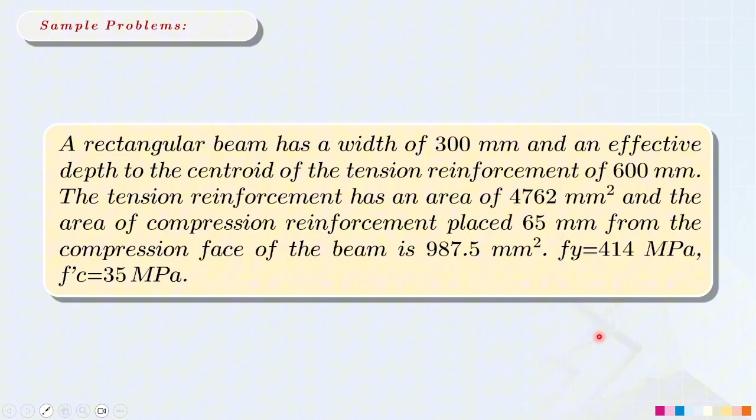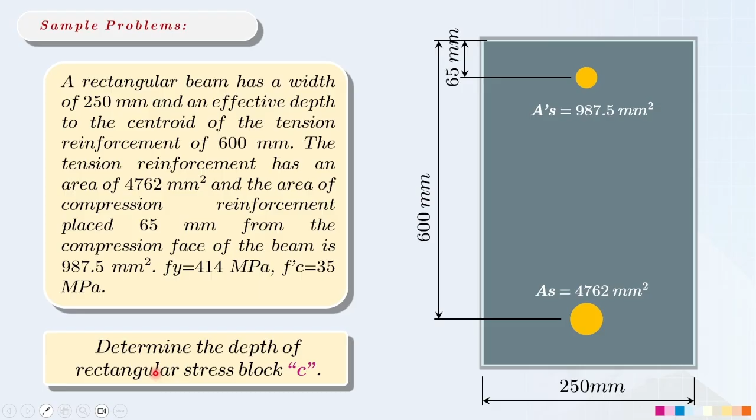So in detail for our section, this is how it looks. We need to analyze if this is a doubly reinforced beam or a singly reinforced beam. So we need to determine the depth of rectangular stress block, which is the variable C.

Let's have our preliminary steps, which is very important in determining if this section is doubly or singly reinforced. Let's determine first the effective depth to the tensile steel, which is 600 millimeter. And for our effective depth to the compression steel, as stated in the problem, the value is 65 millimeter.

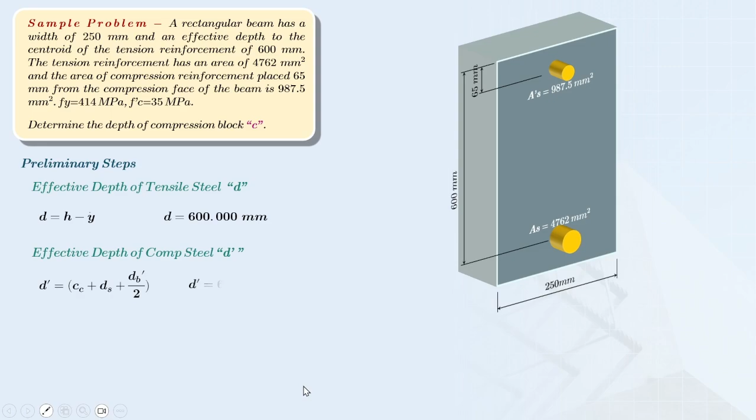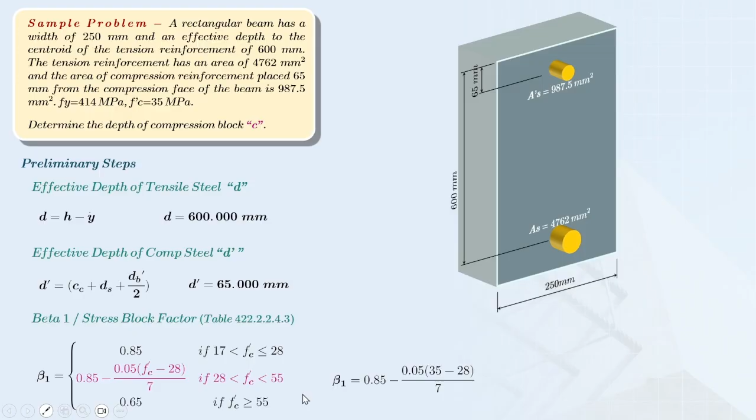So let's determine the value for our beta 1, or the stress block factor, which is dependent on the value of F prime C. Our F prime C here is 35 megapascal, so this will fall under our second condition. By simply substituting in this formula, our beta 1 here is equal to 0.8.

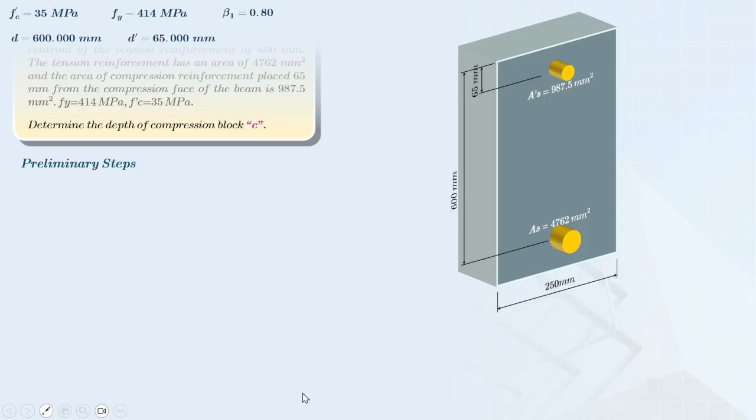Since the area of our reinforcement in total is given, for tension this is 4,762 square millimeter, and for compression this is 987.5 square millimeter. So in determining our actual steel ratio, which is the total steel reinforcement in tension, we just divide it by our gross area. So the result here is

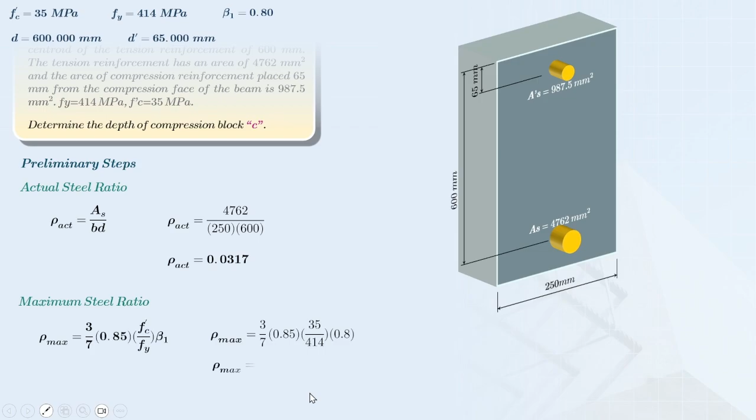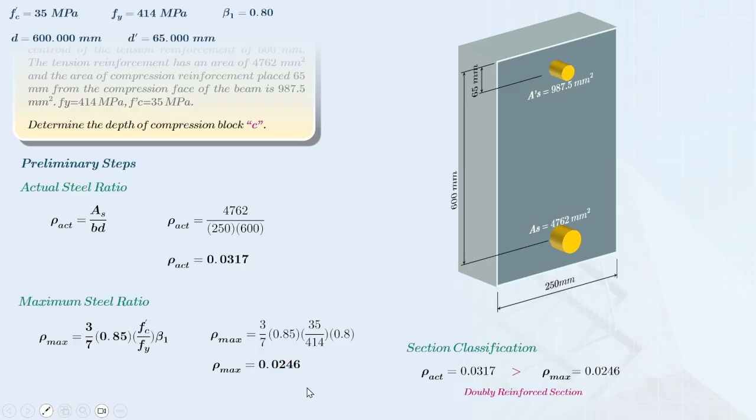0.0317. For the maximum steel ratio, using this formula, the value we get is 0.0246. In comparison, our actual steel ratio is higher than our maximum steel ratio. Therefore, this is under a doubly reinforced section.

In this manner, we will consider the area of the compression steel reinforcement. So we will have two kinds of analysis: first is the stress diagram for our concrete, and the second one is the stress diagram for our compression steel.

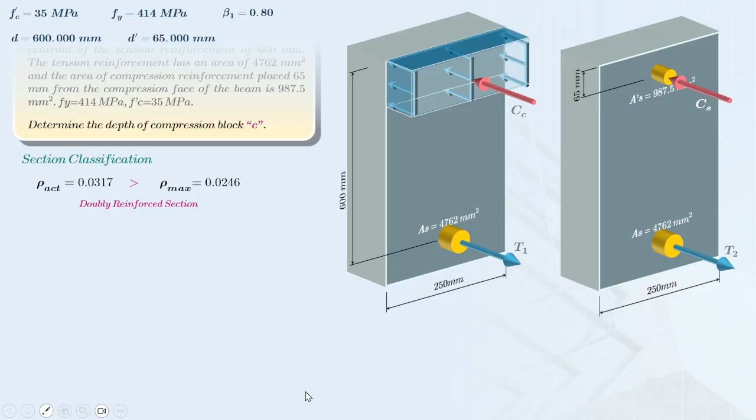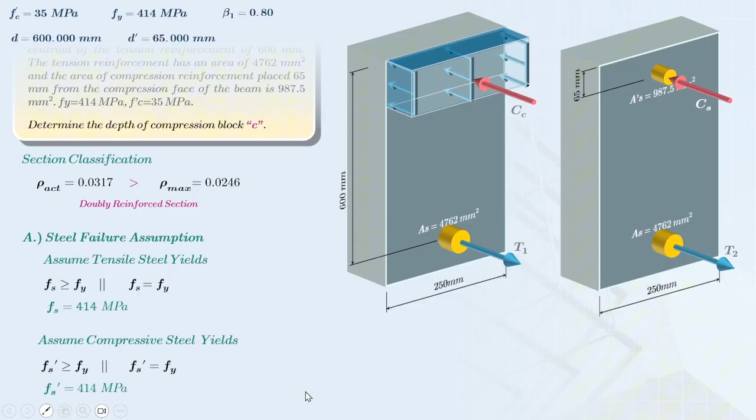So for this doubly reinforced section, for our steel failure assumption, we will assume two kinds of failure. First is for our tension reinforcement, I will assume this as steel yields, so I will consider that my rebar strength is the yielding strength, which is 414 megapascal. Then for my compression steel, I will assume this as yielding also, so I will use the value for my Fs prime, which is 414 megapascal also.

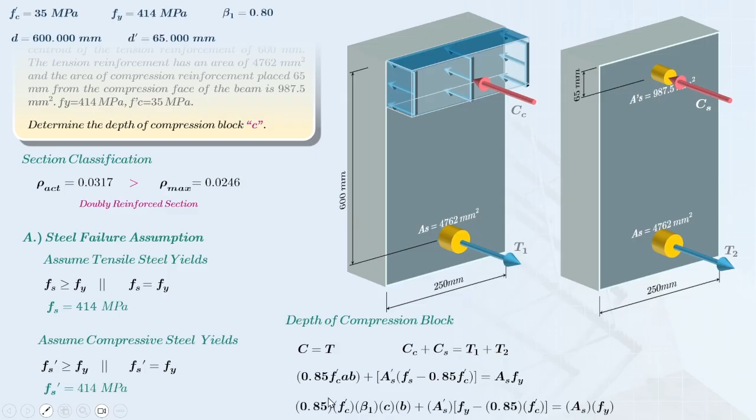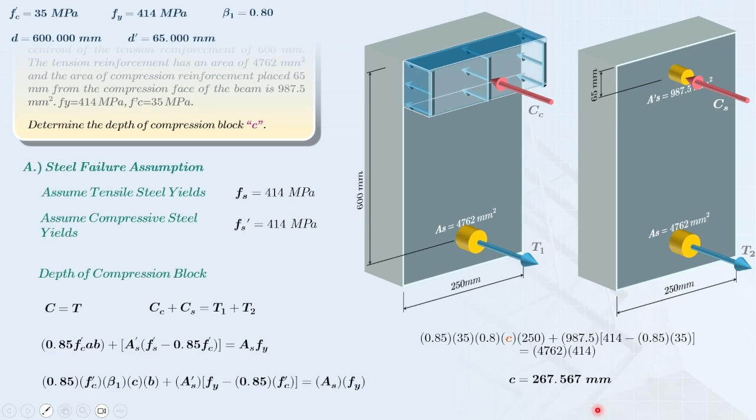In determining for our first sample problem, which is to determine the depth of the compression block, the value of C, I will utilize the equilibrium compatibility. Substituting the equation, this becomes our more detailed equation. What I did here is substitute the formula for A into beta 1 times C. Let's substitute further to get the value of C, which is 267.567 millimeter. But we cannot yet consider this final, because we need to confirm our assumption here.

This is by determining the actual rebar strength, which for the tension reinforcement, the value we get is 745.460 megapascal, which is greater than 414 megapascal, meaning this still yields. This means our assumption earlier was correct, that our tension reinforcement yields.

Then we will also determine the compression reinforcement, which is we need to determine the actual rebar strength. The result here is 454.242 megapascal, which in comparison with our yielding strength of 414 megapascal, still yields. But please take note later on we will have substitution for our design moment.

Since the actual rebar strength for the compression steel passed the yielding strength, we will use 414 megapascal. But still, our assumption here is satisfied. That means for our final answer, the value of C here is now equal to 267.567 millimeter, as the checking of the assumption here is now correct.

Now let's have this next follow-up sample problem. From this given, we need to determine the depth of rectangular stress block A. This is very simple because we will use this formula. You need to just multiply the depth of the compression block by our beta 1. So the depth of rectangular stress block A is now equal to 214.053 millimeter. So that's our answer.

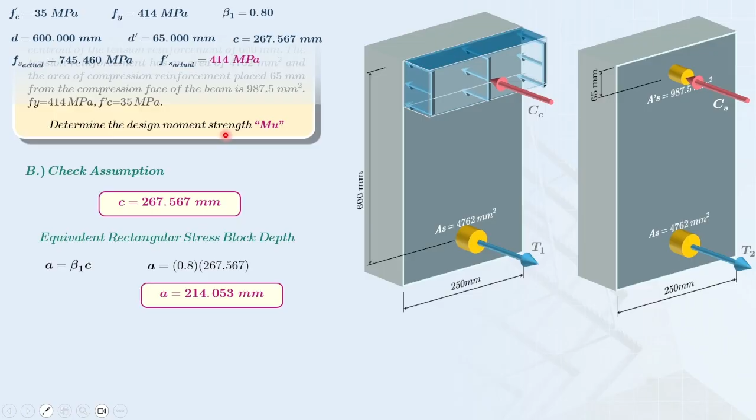For the next follow-up sample problem, we need to determine the design moment strength, or the ultimate moment strength M sub U. Of course, we need to determine first the strength reduction factor, which is based on this condition. By the way, our rebar strength for tension is 745.460 megapascal, which is between 400 and 1,000 megapascal. That means this is under a transition controlled section.

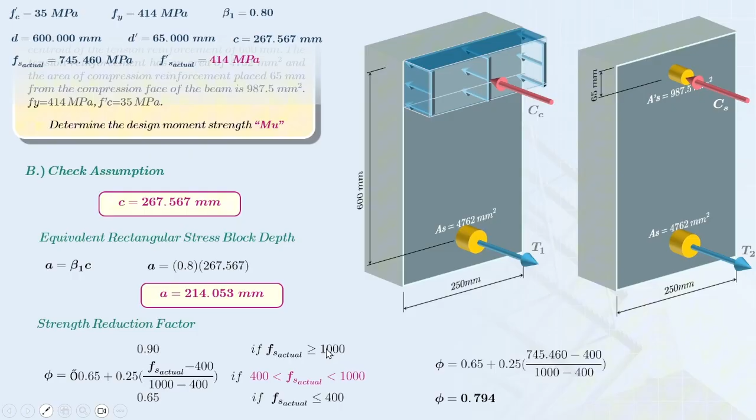That means we will use this formula to get the value of the strength reduction factor. Let's substitute the 745.460 megapascal into this formula so that our strength reduction factor is now equal to 0.794. So we will use that when we are now determining the design moment strength.

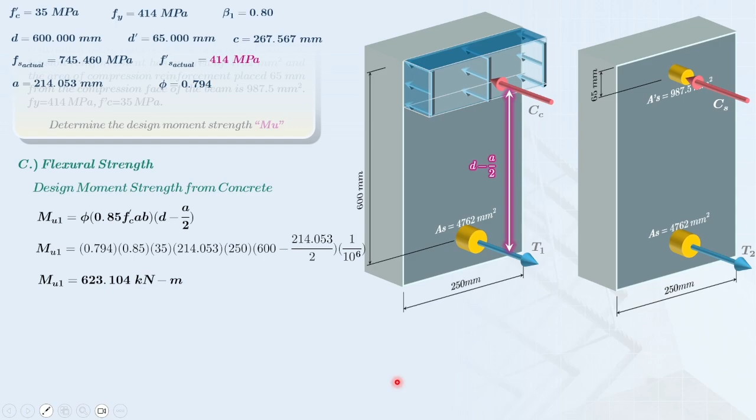Since this is a doubly reinforced section, that means we will consider two stress diagrams. We need to determine first the design moment from the concrete, using this formula. By substituting everything, the first part of our ultimate moment strength is now equal to 623.104 kilonewton meter.

After getting the value for the design moment strength from the concrete, we need to determine also from the compression steel, using this formula to get the second part of our design moment strength. By simply substituting this value, we get 19.210 kilonewton meter. After we get the second part, we need to add them together, so the total design moment strength is now equal to 642.314 kilonewton meter.

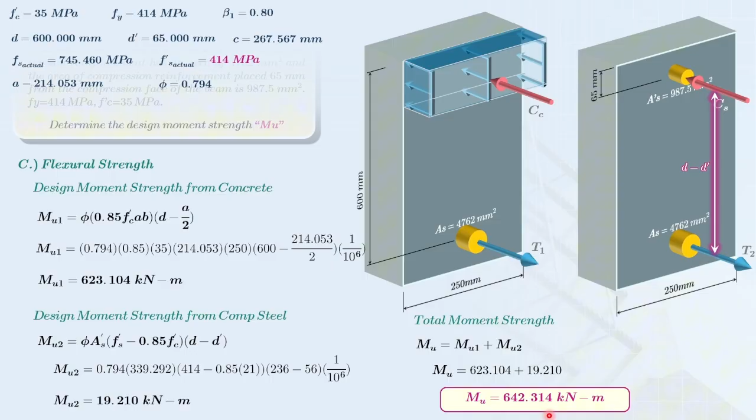We will use this for our next sample problem, which is we need to determine the ultimate concentrated load at the midspan in addition to the dead load of 20 kilonewton per meter. This includes the self-weight of the beam, and the beam here is a simply supported span of 6 meters.

In this case, let's first get our ultimate load for our uniform load. Since the given is only a service load of the dead load, which is 20 kilonewton per meter, let's substitute it so that we get the value for the ultimate uniform load of 28 kilonewton per meter.

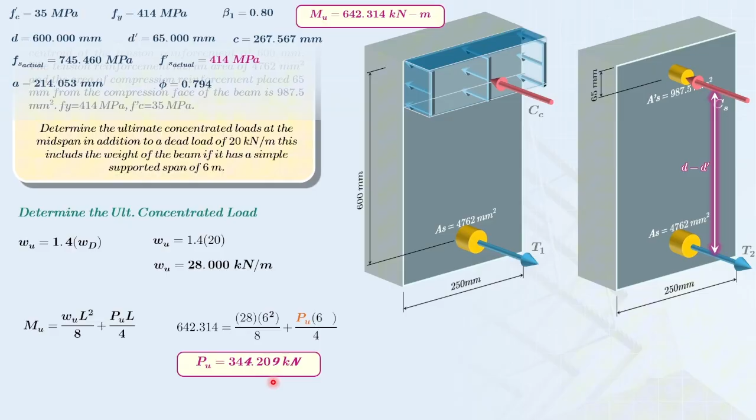For determining the ultimate concentrated load, since we are given a uniform load and a concentrated load, for the ultimate moment from the uniform load, you will use this formula. Then for our concentrated load, you need to use this formula also. Combining these two, we get the maximum moment, which is the value for our design moment strength. Let's substitute to get the ultimate concentrated load, which is now equal to 344.209 kilonewton. And this is our answer for this sample problem.